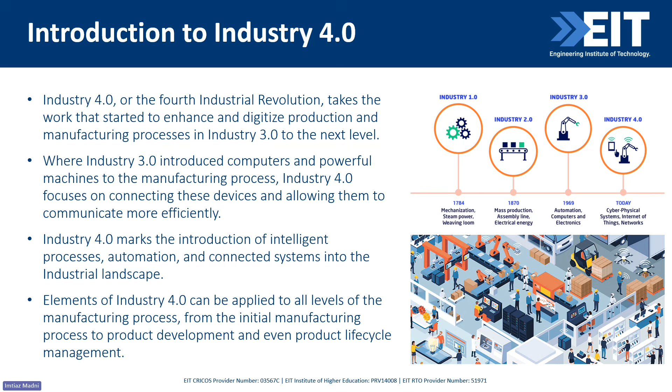So from initial manufacturing process to product development, and then even the management of the life cycle of the products, there's a lot of focus on sustainability. The drivers of future manufacturing are basically the capabilities we have developed, with some technological breakthroughs like additive manufacturing, cyber physical production, and advanced data analytics, which help us optimize systems, production, and the use of resources and energy. And then there are policies and trends which are

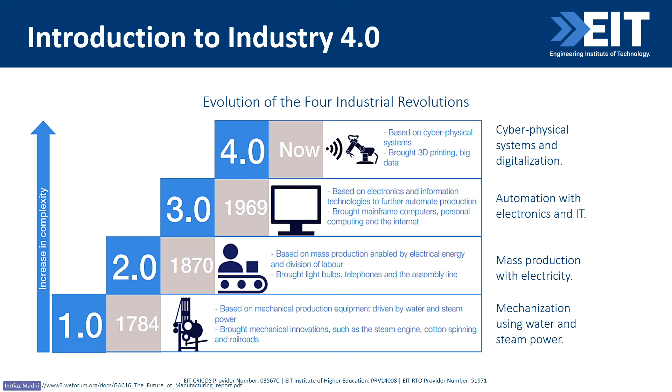This is happening now, and we're already talking about the next steps, like Industrial Revolution 5, because things are developing very fast. Technology is developing at an exponential rate, so we have so many breakthroughs and advances in technology. It may be very soon that we have more advances in our manufacturing processes.

The key components are these, which I already briefly mentioned: Internet of Things is the main component, and then we have IT systems like machine learning and artificial intelligence, which are basically driving this revolution. Because of those data processing capabilities, now we can build cyber physical systems. With advances in IT networks, we have a lot of cloud computing capabilities, which is making big data possible, and processing and data analytics more feasible. Smart factories are obviously a key component of Industrial Revolution 4.

Internet of Things basically refers to those equipment, devices, and instruments. The concept is that everything is talking to everything else, making every device and machine smart enough to communicate with other machines and devices by themselves, without human intervention. That makes them more efficient because they can make decisions on their own, rather than in the past, where we had operators looking at SCADA screens and responding to certain events.

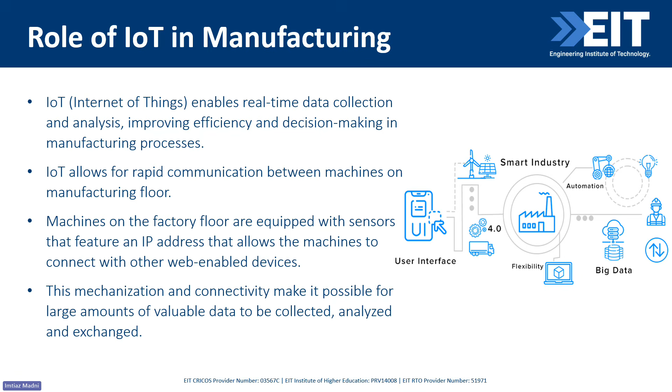So next is big data. Big data basically refers to a large amount of data, as the name says.

When we make things smarter, like with the Internet of Things, everything is talking to everything else. How they are talking is with data. So everything is becoming more data intensive, and we need something like big data analytics to work with such large amounts of data.

With developments in big data analytic techniques like machine learning and AI neural networks, they are very supportive of the Industry 4.0 concepts.

We can have structured data which we can label. In terms of manufacturing, like in the process industry, we have structured data where we know the labels, like temperature, pressure, different parameters. But there could also be unstructured data relating to the conditions or events happening in the process.

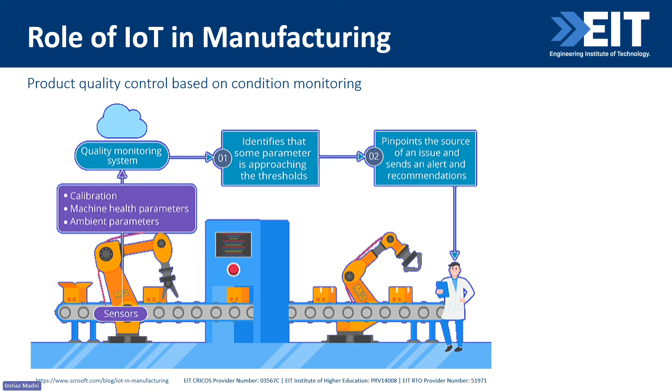The same applies to industrial machines: with condition monitoring, we now have the ability to continuously monitor their condition, so we can be more efficient in maintaining their health. That's where IoT is very useful.

Similarly, industrial asset tracking is also a very useful method to keep track of your assets, where they are, and how much they are being utilized. In terms of economics, that also helps, as you can allocate the right resources to the right jobs.

When assets are not being utilized, you can divert them to other parts of your system where they could be utilized. The same applies to machines: with real-time monitoring, we can monitor their utilization rate and what we can do to improve it, and probably come up with different products or varieties of products to make them useful.

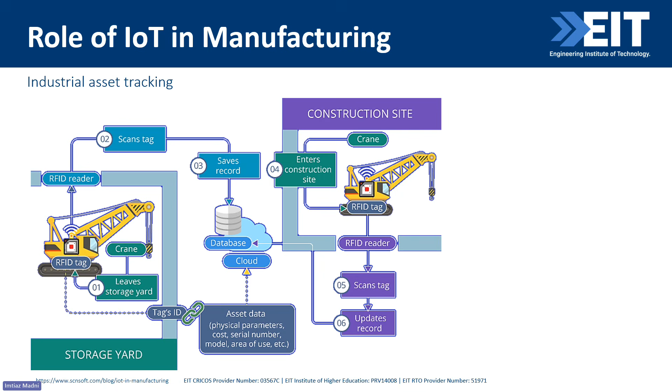That's another benefit of using these Industry 4.0 processes like IoT and big data analytics. One of the best advantages of Industry 4.0 processes like IoT and big data is predictive maintenance. That has been adding a lot of value already in industries which have implemented those processes. As the name says, predictive maintenance predicts when you need to do the maintenance, and that saves a lot of cost.

You no longer need to do regular testing or inspection. Basically you are monitoring the data in real time, and then we use algorithms like machine learning and other models which learn from historical data and provide insights about what is going on with our equipment and when to expect something to deviate, so we can plan maintenance. That reduces the downtime and increases the production, so there are a lot of economic benefits in that.

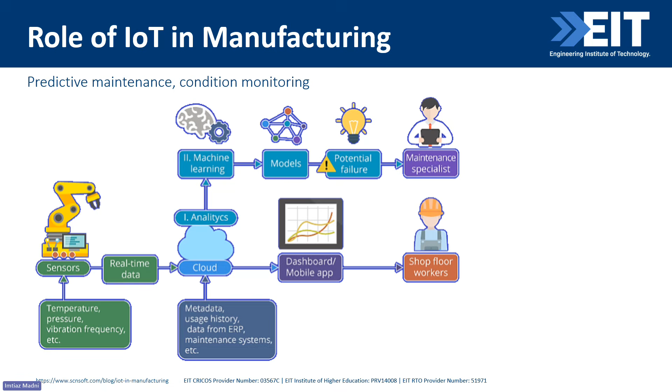As I mentioned, artificial intelligence and machine learning are proving very valuable for manufacturing as well as other industries, since they can create insights, providing visibility, predictability, and automation of operations and business processes. These components allow manufacturing companies to take full advantage of information they generate throughout the industrial process.

So in real time, we can have manufacturing planning. That also gives an advantage in terms of marketing or sales. It can provide insights into business processes and help companies stay one step ahead of potential issues with devices. These tools then allow for more advanced automation.

Basically, it's all that data we collect, then we apply machine learning and artificial intelligence algorithms to understand our processes and equipment better, and we can increase the uptime, reduce downtime, and increase the efficiency.

Cyber physical systems are a main component of Industry 4.0. That's where we have integration of the cyber system, like the computational or networking world, and the physical processes. This enables manufacturing capabilities, so basically we can produce stuff in real time according to the demand. That's where cyber physical systems go hand in hand.

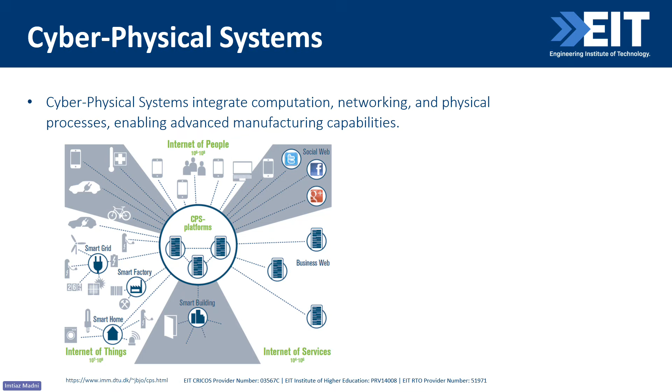For example, when you're using solar power, it makes sense to have higher production when there's a lot of solar. Then when there's less solar, you can ramp down your production. That kind of interaction or integration is possible due to these cyber physical systems.

Cloud computing is another key component of Industry 4.0. Cloud computing helps in decentralization of your data. In the past, we used to have localized servers and storage warehouses, the data warehouses, but now it is all going to the cloud.

That's because it offers several advantages in terms of management. The biggest advantage is that you don't have to worry about maintaining, repairing, or monitoring your data warehouses or data servers. Basically, you have a specialized organization and specialized people who are doing that for you, and they offer their services to you, so then you can pay as you go for those services.

So cloud computing is quickly becoming the cornerstone of virtually any Industry 4 strategy. Basically, these cloud technologies allow for easy integration of supply chain, engineering, production, sales, and service. You can sit in any part of the world and access the data there due to these cloud technologies. They allow industrial companies to collect and use data from various landscapes easily.

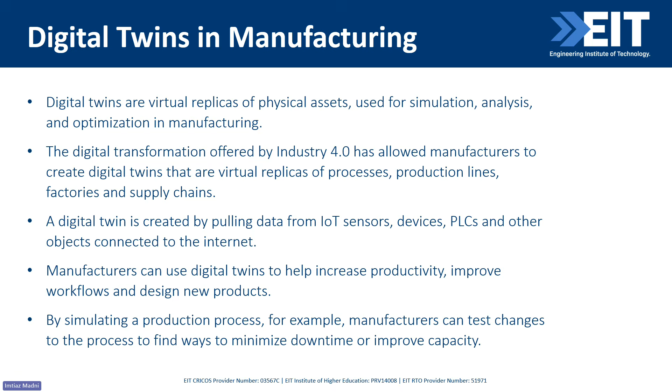A digital twin is created by pulling data from IoT sensors, devices, PLCs, and other objects connected to the internet. Manufacturers can use digital twins to help increase productivity, improve workflows, and design new products. By simulating a process, manufacturers can test changes to find ways to minimize downtime, improve capacity, or introduce a different variety of a product, without losing anything on the physical system - you can simulate and test before going to your facility.

So some use cases - several industries have opted to go for Industry 4.0 automation. Mitsubishi Electric is one of them. Their plant in Thailand was in collaboration with True 5G and robotics company Lertvilai.

They created this smart factory prototype at their automation park in Thailand, basically utilizing the same components we discussed - an intelligent 5G network for high-speed data processing and inspection of production lines, autonomous mobile robots called AMRs, and artificial intelligence. So they have transformed into this smart factory, which is already producing benefits for them. This is just an illustration of how they achieved this level of automation.

Basically, it's an integration of physical processes with cyber processes - a cyber physical system - made possible with edge computing, like we discussed. Edge computing helps at the interface, and then you can use different types of communication protocols - rules and sets of laws which govern the data communication. There could be several different types of communication protocols at different levels, like Profinet, Ethernet, and TCP/IP, at this interface to edge computing. Then we have application layer protocols like Modbus, MQTT, and DNP3, among others, to provide automation at the application level.

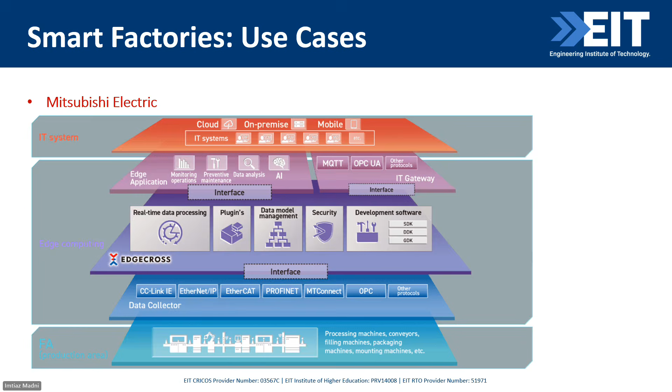Another company is called Makino Asia. They have also taken this path to Industry 4.0, investing around $74 million to make their factory smarter. Basically, they produce some tools and devices like CNC machines. To meet the growing demand from customers and ensure factory machines worked at peak levels, Makino Asia has developed vision recognition robots and robotic arms, AR-based remote assistance, and self-driving forklifts.

So they all need to talk to each other, right? The forklifts can drive themselves to stock or reload raw materials, and similarly the robotics can talk to each other too, because there could be several steps in producing their machines. These robots and automated forklifts increase productivity at the factory without additional labor. And these AR augmented reality devices allow Makino engineers based in Singapore to provide step-by-step instructions via smart glasses, so they can basically control them from anywhere in the world.

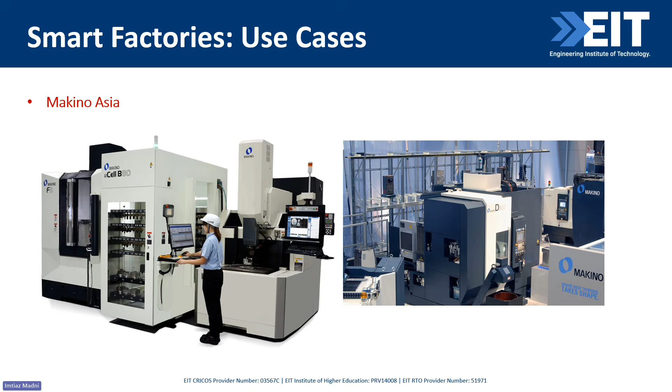This is just an illustration of their factory floor and how they are achieving this Industry 4.0 automation.

Similarly, Schneider Electric's Le Vaudreuil facility - if there's any French guy here, they can pronounce it for me - this facility in Europe is Schneider Electric's Industry 4.0 automation site. This factory works on fourth industrial revolution processes, incorporating up-to-date digital technologies like EcoStruxure, which is Schneider Electric's automation suite. EcoStruxure is also being used in several other industries as an automation suite. Basically, it's a set of different devices, edge computing, and PLCs to automate different processes.

The first application of this EcoStruxure resource advisor saves up to 30% on energy and adds to long-term improvement. So 30% is a big time saving. That's a quick glance of their factory and their automated processes. As you can see, there's no staff or minimal staff required at the actual facility - everything is happening automatically.

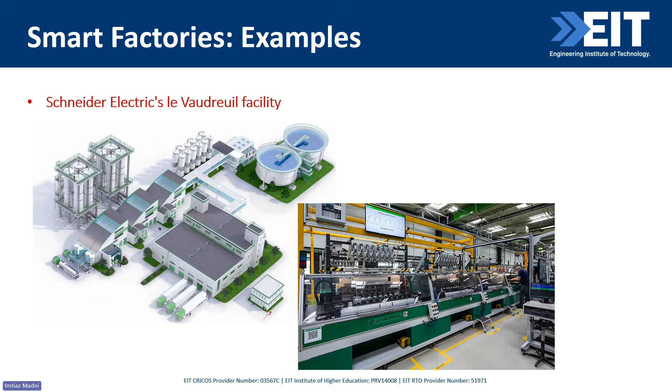So key drivers for Industry 4.0, as we discussed, are technological developments, policy changes, and the need of the time, like sustainability goals. Planning and control is one driver, and then machines - we have these machines now which can work independently and autonomously. Then humans are also becoming smarter. I don't want to say they were dumb before, but they are more technologically capable and skillful, and that's also driving this change to much more smarter and efficient processes.

And O&M, like we discussed, the asset management requirement - like the need for real-time monitoring, condition monitoring, and predictive control - that's also a big driver of industrial automation, especially Industry 4.0.

Like we discussed earlier, there are some challenges in adoption of Industry 4.0. Some are technological challenges, some are social challenges, like culture and mindset. Some people don't like the idea of going to fully automated systems. Some fear the loss of employment and joblessness, and some fear the rise of robots taking over. So there are a lot of challenges in terms of social as well as technological challenges.

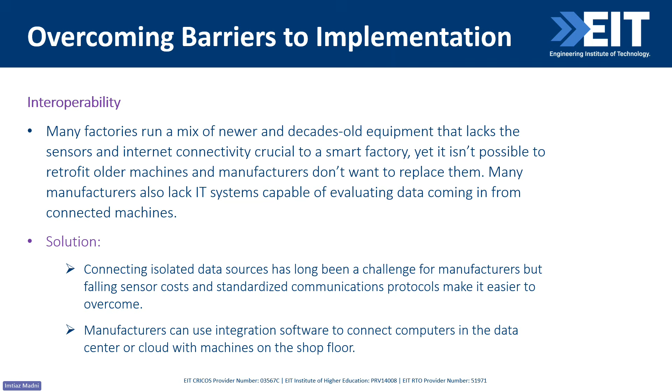Connecting isolated data sources has long been a challenge for manufacturers, but falling sensor costs and standardized communication protocols make it easier to overcome. Nowadays we have standardized communication and automation protocols like Modbus and IEC 61850 and other systems, which are making it relatively easier for manufacturers to move towards newer systems while still using some conventional devices alongside the newer devices, so interoperability can be overcome.

Cost and resource limitation - going for Industry 4.0 obviously comes at a cost. If you want to get all those advanced devices and systems, you have to spend some money. A smart factory requires investments in making IoT systems compatible with older manufacturing control and execution systems.

Constraints on technology investment can prevent scaling of Industry 4.0 projects. So instead of waiting until a complete IT architecture is defined and rolled out before implementing Industry 4.0 projects, we can do a minimum viable product, or MVP, approach - very commonly used in industry. We can introduce projects on shorter lead times and course-correct based on users' feedback, basically having a progressive change in manufacturing. This approach can help focus spending and define the scope of the projects.

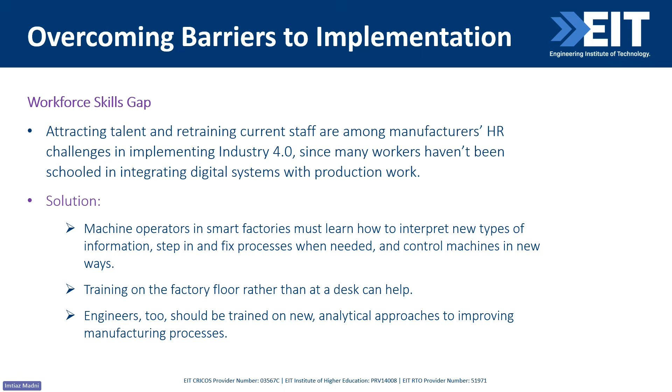Another barrier is the skills gap. These advanced technologies and systems require certain skill sets, so a lot of staff trained to work with conventional systems need to be retrained. Machine operators in smart factories must learn how to interpret new types of information, step in and fix processes when needed, and control machines in new ways. Training on the factory floor rather than at a desk can help. Engineers also need to be trained on newer analytical approaches and manufacturing processes - something to keep in mind when going for Industry 4.0 transformation.

Similarly, change management is the same. Manufacturers should identify use cases and sites that yield quick wins and financial returns so that change management can be justified. The success of an Industry 4.0 project depends on employees actively using the new technology - basically justifying the ROI, return on investment, to managers so that change management can be easier and they can approve the changes.